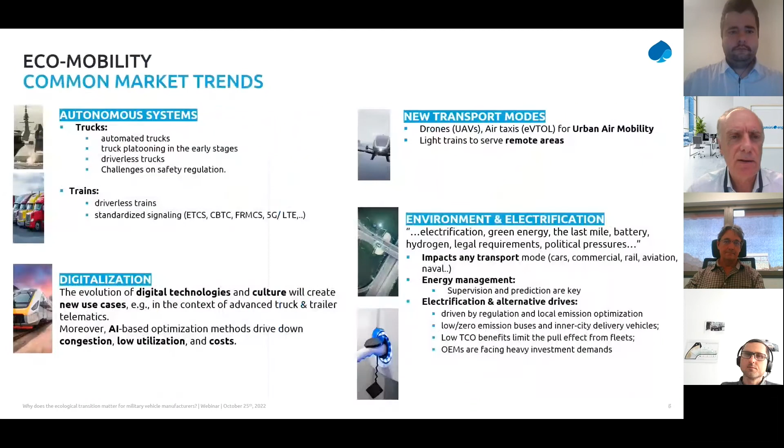So let's go to the challenge quickly. Most of you know the specificities of this tiny molecule, the tiniest of the universe. It has a very good ratio of weight versus energy, but very bad in terms of volume. It leaks very easily, it's very corrosive. And to use green hydrogen, which is the objective, you need a huge amount of electricity, talking about electrolysis production technology.

There are challenges on the whole value chain to produce, distribute, and store hydrogen. We'll discuss a lot about this notion of hub, and market reactions differ depending on the market. In aviation, these are the most fierce challenges to face because of safety and the constraints of volume, which lead to using a liquid form of hydrogen with thermal and cryogenic issues.

So definitely aviation is the most challenging market for hydrogen. Rail, at the opposite, appears to be the most simple, because any diesel train is already electrified, and volume and weight is not as challenging as in aircraft. We have existing and operating solutions on that already.

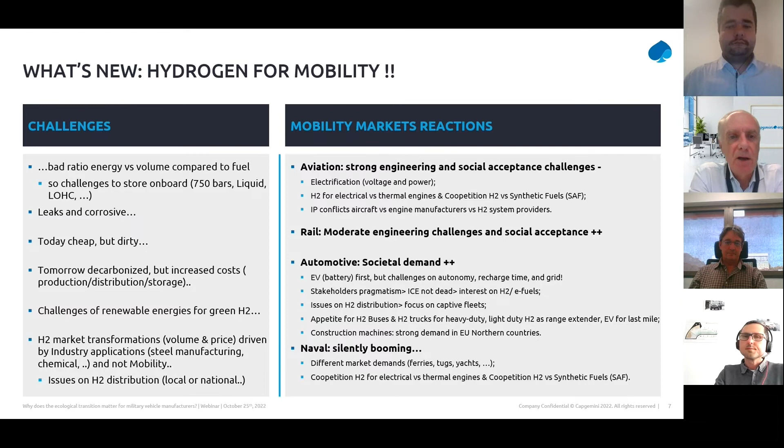Next slide, please. So hydrogen is an old story.

Just a slide to illustrate what's going on at the moment: which countries are producing hydrogen, but which kind of hydrogen are we talking about? We're talking about hydrogen produced thanks to SMR, steam methane reformation, on gas or eventually coal. It works well, the technology is very mature, but it produces a huge amount of CO2. So there's no way to reduce CO2 emissions on usage when you're producing a lot in the hydrogen production.

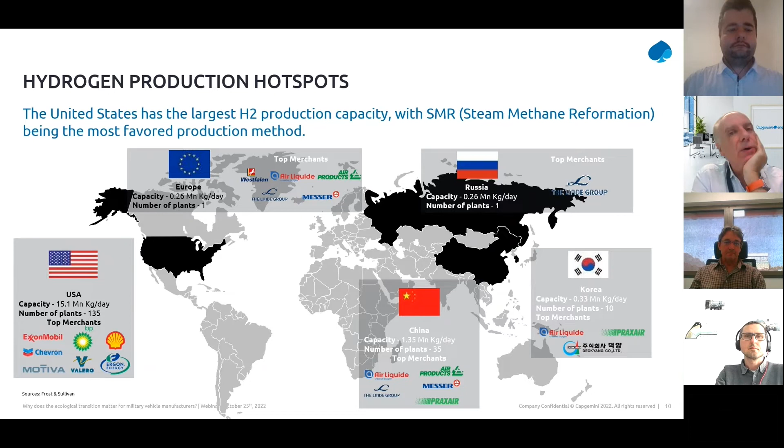Fuel cell: hydrogen is something massively used for decades in heavy industry, same for fuel cells. The first fuel cell was invented in 1839, so nothing new there. The technology and the bricks are already there. So what is the challenge, and what are the opportunities?

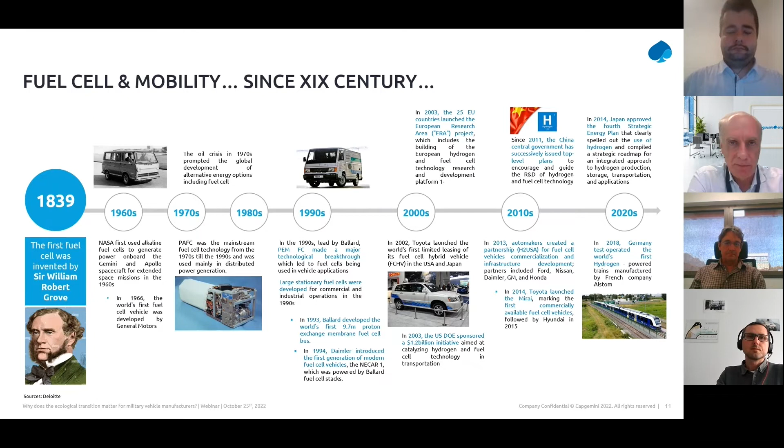What's new is the fact that we are trying to tackle CO2 and global warming, and looking for ways to have mobility that produces much less CO2. So green hydrogen is a solution. Green hydrogen is made from water electrolysis, which requires a huge amount of energy but produces no CO2. So it's very interesting in terms of zero carbon footprint, with very good social acceptance, but the cost is quite expensive at the moment.

Gray hydrogen is absolutely the opposite: it generates a huge amount of carbon, production costs are quite low, and social acceptance isn't that good either. In the middle we have blue hydrogen, which is gray hydrogen produced thanks to SMR, but the CO2 produced is not released—it's captured using CCUS techniques.

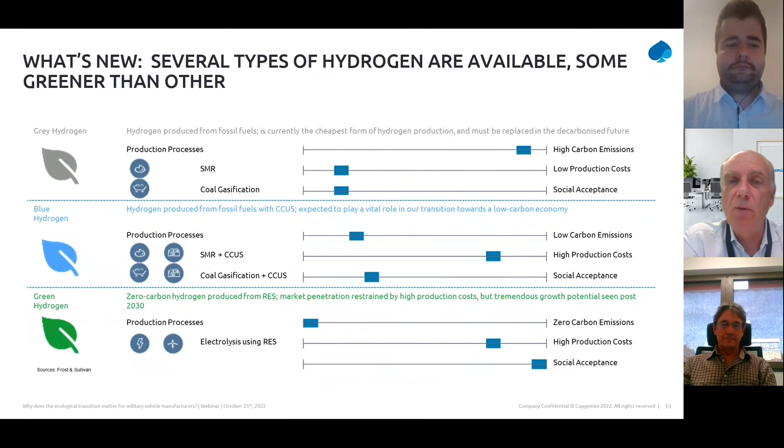So what's new is different ways of producing hydrogen. What's new is the hydrogen value chain. When thinking about usages other than pure heavy industry, we face challenges on distribution, which we'll come back to a lot during this webinar. We can use pipelines, eventually blended with natural gas, or pipelines transporting pure hydrogen, or we can use boats, trains, trucks, and so on.

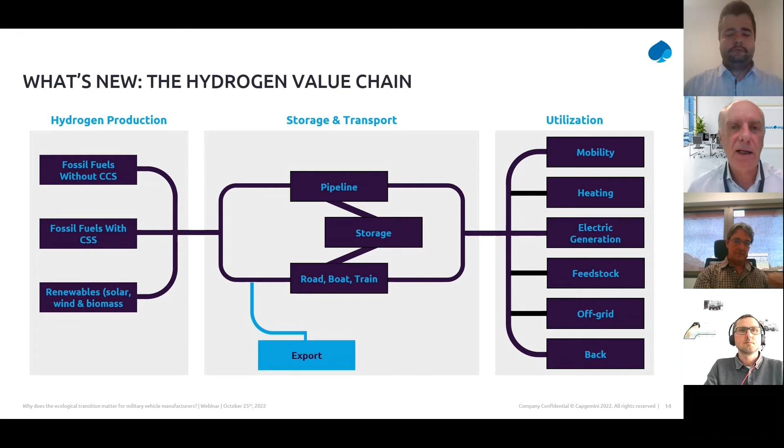We can use gaseous form, liquid form, eventually solid form. This is something different, and the utilization and use cases are much more numerous nowadays than 20 or 30 years before. So what's new is the place of hydrogen inside mobility, and wider than that, lots of different use cases. So we know that transportation emits around 25% of global CO2.

25% is not that big, but it's still a challenge to be tackled, and depending on the market, the CO2 volumes really aren't the same: automotive, aviation, naval, and rail.

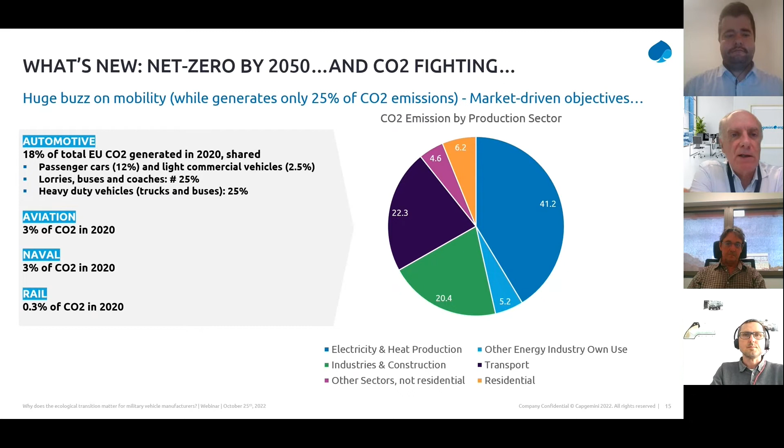The first reaction from a political perspective is that we need to go this way—we need to help the stakeholders, we need to help the industrials face and tackle the challenges. One way to do that is to provide subsidies and money on the table. This is valid for the US, France, Germany, Italy, and Europe. Europe built a very straightforward roadmap and action plan, very prescriptive, with lots of accessible information.

The second reaction is from the market perspective: stakeholders want to collaborate very closely to be more efficient. Effectiveness is the key word on this global hydrogen challenge. So you have lots of collaboration between sometimes competitors, sometimes energy producers, distributors, users, tier ones, OEMs, and so on, trying to go faster and save time and money to achieve the target.

Okay, so quickly, the Capgemini value proposition. Our vision is to help our customers tackle TCO, total cost of ownership, in two directions: pure engineering and economics, taking into account the operations of their system.

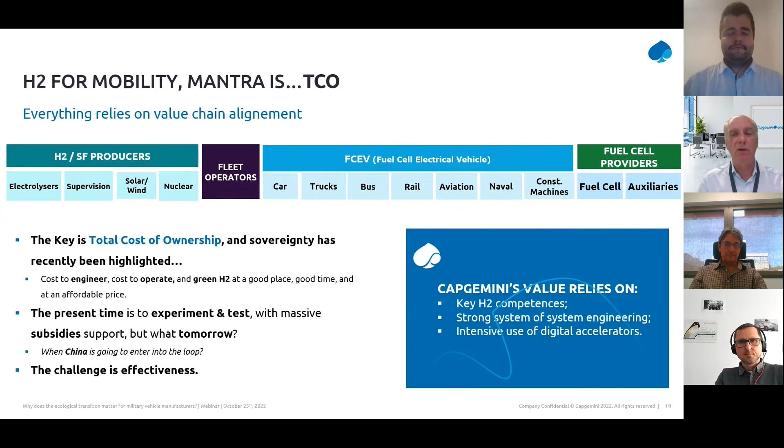First of all, the engineering and system engineering on any part of this value chain. The hydrogen expertise that we have, notably coming from research and innovation, and intensive use of digital accelerators.

So what we're building is engineering across all the key disciplines: thermal, cryogenics, safety, electrification, and so on. We need hydrogen expertise, notably, as I said before, from the R&I dimension.

And some accelerators that could be summarized as simulation plus plus, going up to digital twins sometimes, and AI-based assets that help predict the cost of energy, predict maintenance, and predict different kinds of challenges that can ease and tackle the CO2 and TCO objectives.

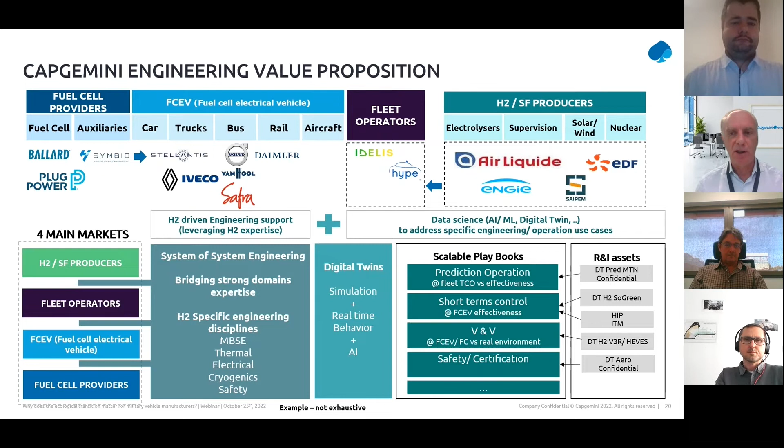Another way to illustrate that: any part of this global value chain is to be simulated. This is the situation today, and again, a huge amount of data to be produced. Sometimes there's some IP conflict, but we are an independent and pertinent company, so this is a very interesting situation for us to help our customer.

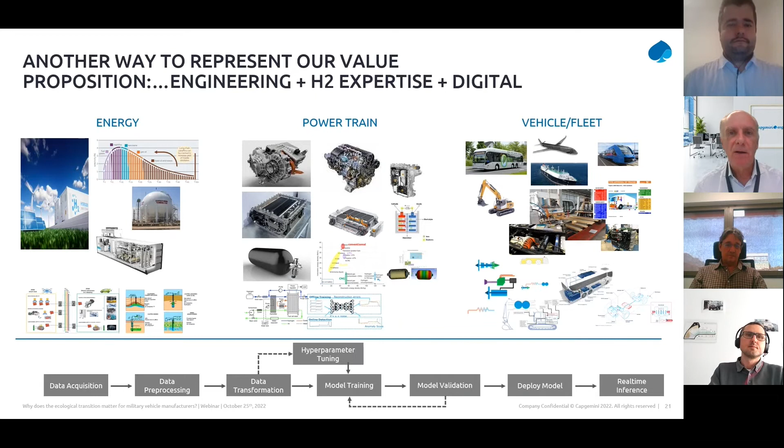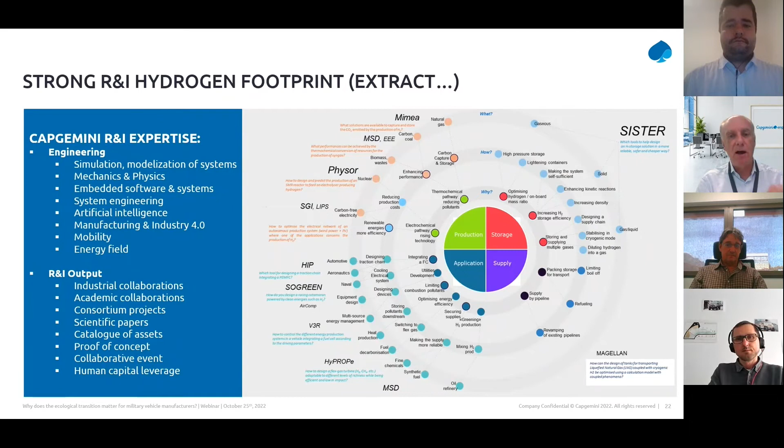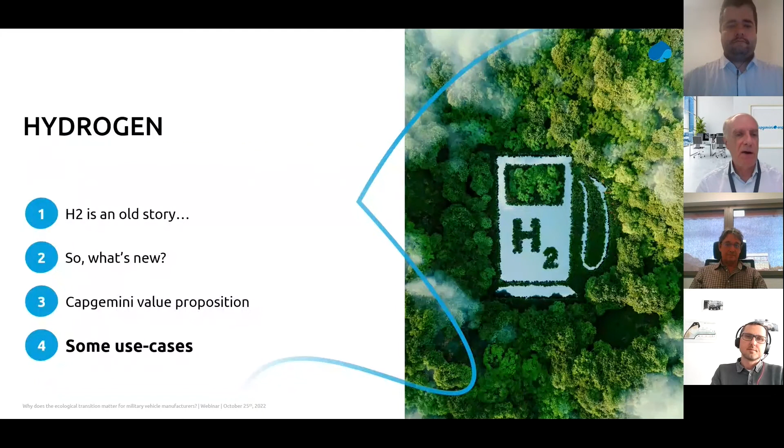I'm going fast because of the time, but all this information will be accessible on the web after the webinar. So, some use cases, quite interesting I think.

We do have the capability, for a long time now, to help customers integrate fuel cells inside different kinds of environments, from telecom stations to a tram, a bus, a train, or a boat. We also have the capability to manufacture and build hydrogen test benches, so we know what the challenges are to integrate fuel cells inside vehicles.

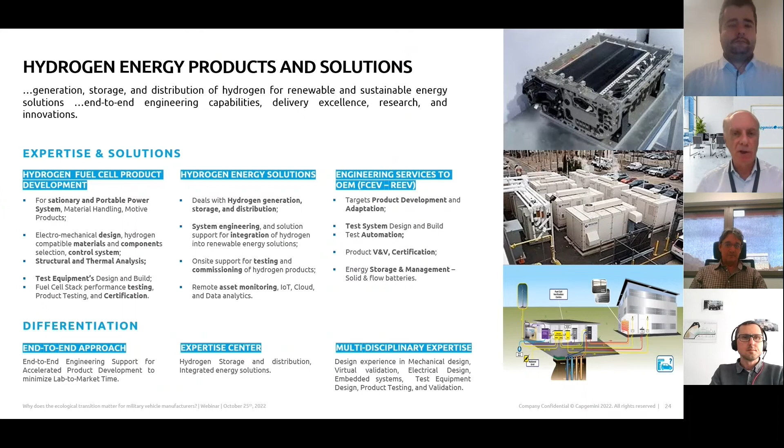This is another very interesting project, quite confidential, so I won't name the clients, but let's say it's a worldwide fuel cell provider that sold its fuel cell to a bus OEM, which sold the bus to a bus operator. And what happened?

Every day at night, the driver coming back to the garage stores data into a black box that goes to a private cloud belonging to our customer. So we have a huge amount of data to play with and to generate some valorization from.

And so we did. We used 2 years of recording for a fleet of 6 buses, and we helped the customer understand what happens in terms of effectiveness, to predict equipment failure. Nowadays, we are going to run this analysis not only in the cloud but very close to the fuel cell—an interesting roadmap and very exciting projects.

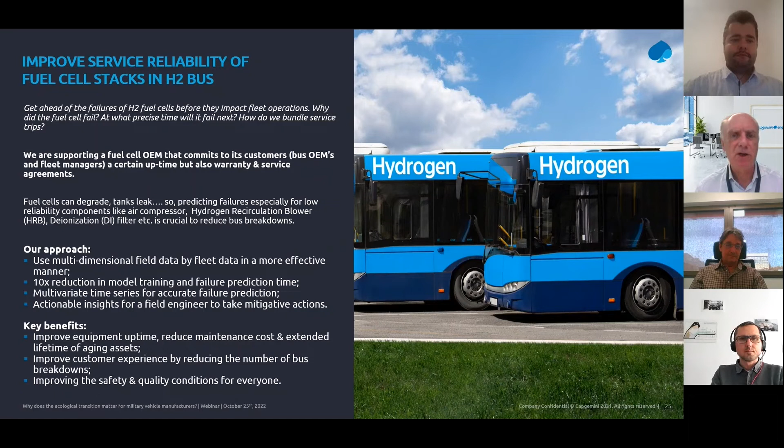We're talking about submarine. What did we do there? We help the customer integrate the whole hydrogen system inside a submarine. The system is composed of reforming methanol to generate hydrogen, to power a fuel cell, to power an electrical engine.

So we face two kinds of challenges. First of all, pure engineering, as I said before: thermal, safety, electrification, and so on. And the safety certification. We help the customer on two dimensions: the pure safety for the prototype to be certified, and from an engineering perspective, to integrate and make the system work inside a very confined environment. This is it for me.

I would be happy to answer any question that will be coming afterwards, after the session, or eventually after the webinar. Thanks a lot.

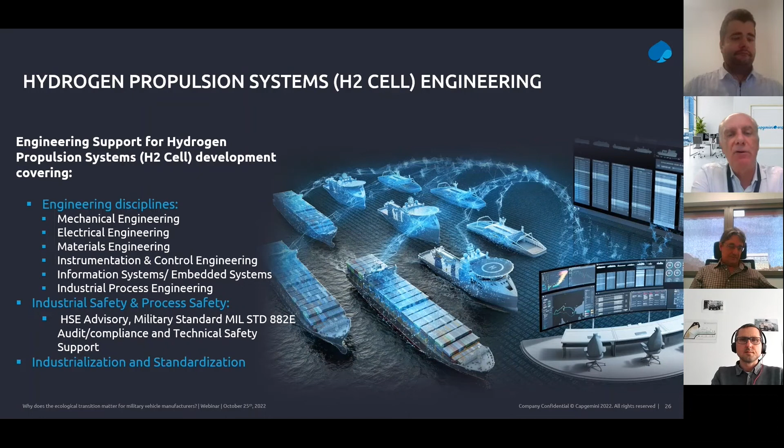Jean-Luc has drawn an overview of the different usages of hydrogen in various applications. Now Etienne will explain on the military side how Arquus intends to answer to this ecological transition. Hello everyone, happy to be here today with great speakers and great audience. I belong to Arquus Defense, French military vehicle manufacturer, and I'm leading the energy subject.

So why does ecological transition matter for military vehicle manufacturers? Jean-Luc gave a first answer. Military vehicle manufacturers should follow the eco-mobility trend because their components highly rely on commercial vehicle components. The second aspect is that military vehicles, when used in training mode, should comply with legal emission rules. And the last concern is fuel logistics, which is critical on the battlefield, and Bernard Tonon will provide data on this topic at the end. So I will now explain how Arquus intends to answer this ecological transition.

Next slide, please. For Arquus, being a business unit of Volvo Group provides a reliable solution to develop its strategy. The Volvo Group is determined to fulfill its commitment to the goal of the Paris Agreement. Volvo set a clear target with an SBTi certified method: in 2040, 100% of products shall be fossil-free, and in 2050, Volvo Group shall be carbon neutral.

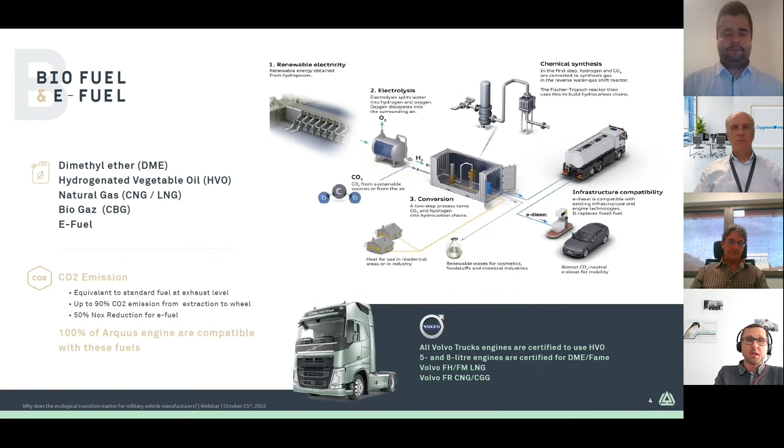Next slide, please. The second step is hybridization. Arquus believes hybrid driveline is the good answer to reduce fuel consumption. First of all, we cannot go to 100% electric vehicles. It is not achievable because even with an optimistic roadmap on battery technology, we would have to replace the 400-liter fuel tank with a battery, where the weight is multiplied by 22 and the volume by 11.

So Arquus already has several experiences with hybrid vehicles. We have the VAB Electer project where we achieved 15% fuel saving. We also have the Scarabée vehicle, seen in the video at the beginning, which is natively equipped with a hybrid driveline. Based on simulation, we think we could achieve, for instance on the Griffon vehicle, 41% fuel saving. Of course, this is because there is a high standstill rate on this vehicle, that's why we can achieve such a figure.

So the next step for us should be to build a demonstrator of a hybrid Griffon with the French Army and confirm this data. Also, we are studying hybridization of a battle tank with the French school Ensta Bretagne, because we think we also have high fuel saving potential on the battle tank.

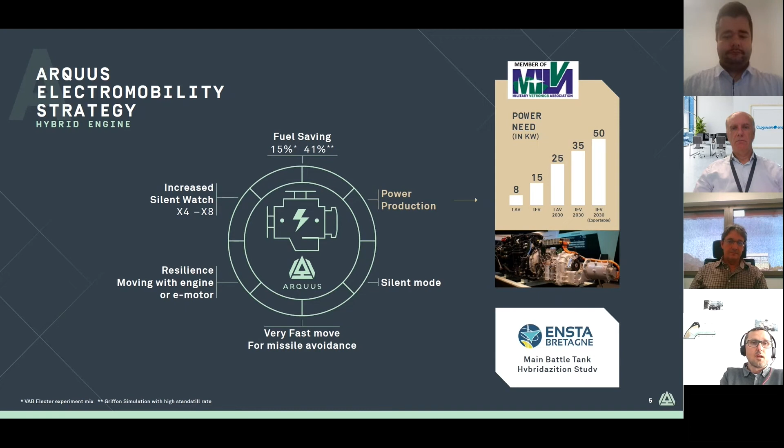At last, Arquus is working with Paris-Saclay University to develop an energy optimization algorithm adapted to military scenarios. Arquus is also a member of the MILVA NATO group to promote high voltage standardization. Next slide, please.

So hydrogen on the battlefield is raising several challenges. Jean-Luc spoke a lot about this, but I would summarize: compact storage, safe storage, air filtering and cooling for the fuel cell is a challenge. Replacing fuel with hydrogen would lead to multiplying by approximately 5 the volume and weight of the current tank.

But of course, for hydrogen, Arquus can rely on Volvo Group technology. We have a hydrogen combustion engine with existing prototype today. And of course, we have also fuel cell developed by a joint venture between Daimler and Volvo.

Also, Arquus believes dual fuel technology could be a solution, because we would be able to rely on fuel on battlefield and hydrogen when vehicle is in training. For storage, Arquus is working with several partners to develop a safe storage approach. And at last, Arquus is preparing calls to build demonstrators applying this technology to make sure hydrogen is a viable solution for military vehicles. So thank you very much for listening to me, and I'll give the floor back.

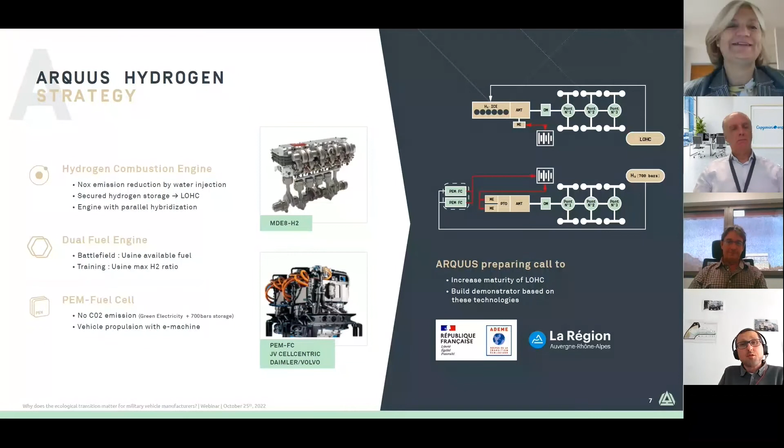Thank you, Etienne. After the military vehicle, our last speaker, Bernard Tenon from CEA, the French government-funded research organization on energy, will present the following topic of new energy technology for military autonomous camps and advanced energy management tools. I let Bernard now speak further on this subject.

Thank you, and hello everyone. Thank you for the presentation. The goal of my talk here is really to try to do the links between the previous presentation and try to do what is going to occur at the camp level. So the objective in the future, we believe that we need to have some evolution of the camp and not to rely only on fossil fuel, which is provided by trucks to the camp, and to find a new way of operating the camps.

Next slide, please. So the first thing that we are going to work to consider forward operating bases, which could be permanent or semi-permanent bases, with some hundreds to some thousands of persons on site, but also some special forces operation bases, which have much shorter time. The present situation for producing the energy at the camp level is relying on diesel genset, and they are using the conventional, unique fuel, which is provided to the camp.

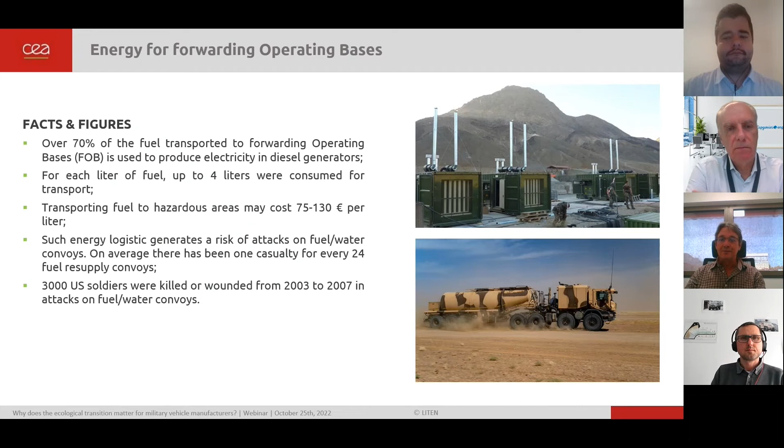Next slide, please. So first at the camp, what we think is that in the future, we need to reduce the energy dependence of the camp from the logistic and try to reduce by, and we assume it is possible to reduce by 30 to 50% the logistic at the camp level. This by two major means. The first one is energy efficiency. So reduce the energy consumption by using more efficient systems, by recovering energy.

I will give you some examples. And the second point, to produce energy locally at the campsite.

So now we have to try to have a global approach of the system, to see from the civil technology what could be used and transported from the civil area to the military area. What type of power sources are available at the camp level? Can we use solar energy? Can we use wind energy? Can we eventually use hydropower, geothermal power? Can we also transfer the waste generated at the camp as energy sources? And what is the energy which could be generated by the heat of these sources?

Then we also have to optimize or maximize all the power conversion systems: heat to power, power to energy, heat to cold. All these conversion systems have to use the most advanced technology in order to reduce energy consumption. As we will rely on renewable sources or sources of energy that fluctuate, and as usage also fluctuates over time, we need storage capacities at the camp level. So we need to be able to store electricity by different means, whatever the solution used. We'll also probably have to store heat or cold in order to avoid peak energy consumption. And we also have to store hydrogen at the camp level.

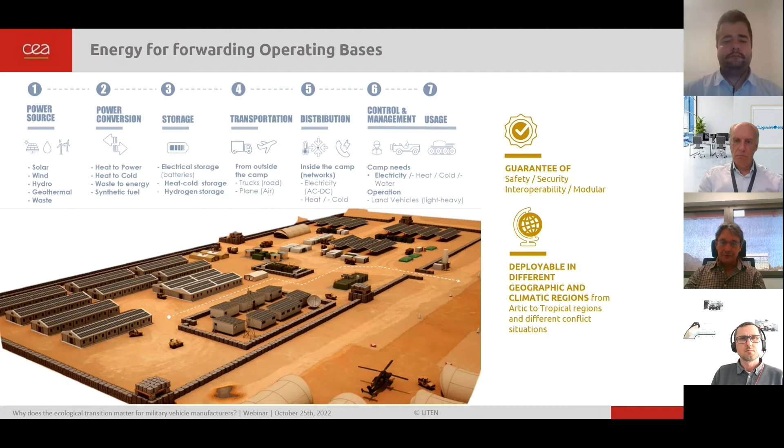Next slide, please. The first thing is we need to change the way we manage energy at the camp level. Today, we only provide electricity using diesel gensets on site, and we need to shift to a more modern way of operating energy at the camp, with local microgrids implemented in different parts of the camp where there is local production and local management of the system. All these microgrids are connected between them and synchronized through a central control system. This way of operating a camp provides higher reliability and higher flexibility at the design level.

This is how we have to design the camp in the future—not a fully centralized system, but something between a centralized system and some autonomous subsystems. Next slide, please.

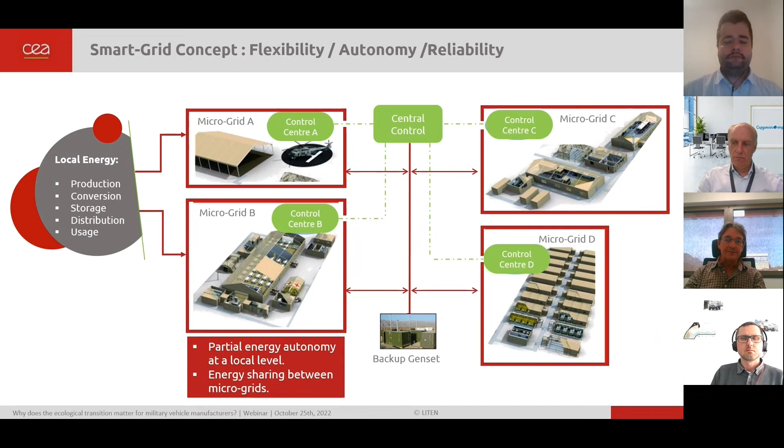In the next slide, I'll try to give you some examples of how we can have energy-efficient systems in order to reduce fuel consumption for the camp's needs. One of the major consumptions at the camp level today is cooling when operating in a hot region, and cooling and heating when operating in a cold region. One of the most important parts of this consumption is air conditioning and refrigeration. Today we use electricity provided by the diesel genset to produce cold, heat, and other usage. As you know, a diesel genset is not a very efficient system—only one third of the fuel energy consumed is converted into electricity. The other two thirds are wasted as heat.

The principle is to try to convert this heat into valuable energy. We can transform heat to cold using absorption technology, generating for instance 50 kilowatts of cold from 100 kilowatts of waste heat, directly substituting this cold for electricity. We can also use this available heat to desalinate water, producing energy directly for water, or we can use the heat directly for sanitary hot water or other heating needs, rather than using electric resistance.

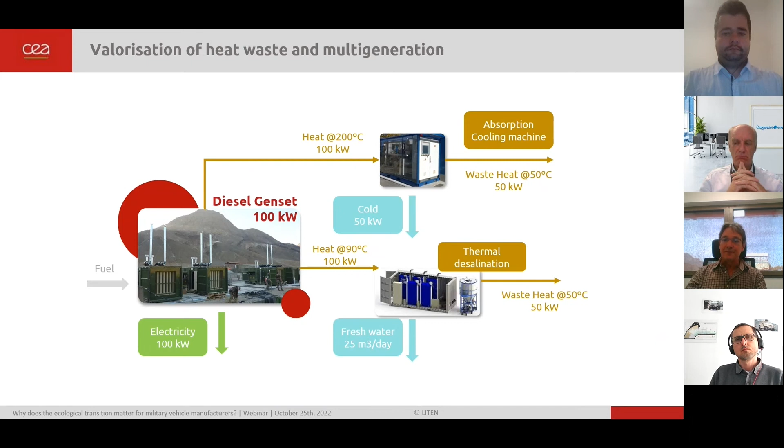Another option is at the camp level. Today at the camp, there is also a relatively large amount of waste generated every day. We estimate that 2 to 4 kilograms of waste are generated per day and per person.

This waste can be solid waste, for instance from bottles and systems at the camp level, but also we have organic waste coming from food. All this food waste can be converted to biomethane, so we have to develop micro-methanization systems, and the solid waste can also be converted to syngas using pyrolysis systems.

What we assume today is that if only 50% of this waste is recovered, we can produce an equivalent amount of liters of fuel, representing about 3 to 5% of the energy consumed at the camp level. 3 or 5% is not huge, but it's not negligible.

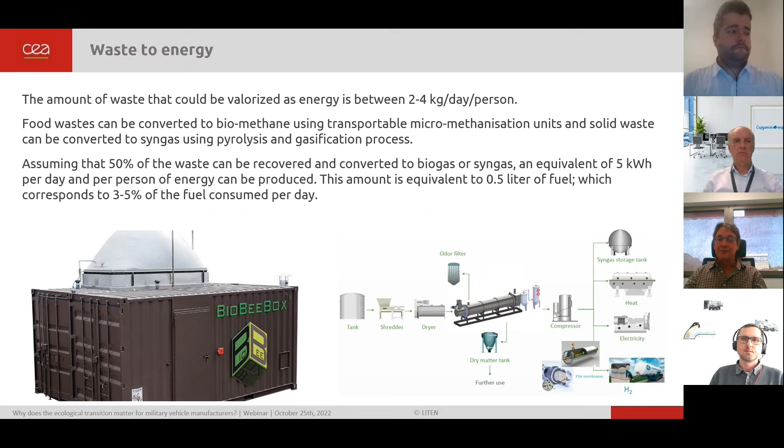We always have to think that 5% of energy reduction is 5% less logistics - that means less convoys which are attacked and more operational efficiency. We always have to think about the impact of energy efficient measures on logistics.

Now coming back to the link with vehicles. As has been mentioned, in the future we'll have hybrid vehicles - vehicles which will rely on hybrid power with electricity or use hydrogen. Concerning electric vehicles...

Today the vehicles have a certain battery capacity, and in order to avoid consuming fossil fuel, it is better to try to recharge the batteries when they are stored in the parking slot during parking of the vehicles, and we try, if possible, to recharge these batteries using renewable energy.

For instance, we can use PV shelters. This is already developed and implemented in civil applications. We know that with advanced energy management systems, we want to charge the vehicles with 80% solar energy.

The second important thing is that as the vehicles will be on site and not always in operation, you can use the batteries of the vehicles - the capacity of the vehicle's generation - to generate electricity for the camp. It can be used as storage capacity at the camp level, and also as a backup system for regenerating electricity in case of losses of capacity.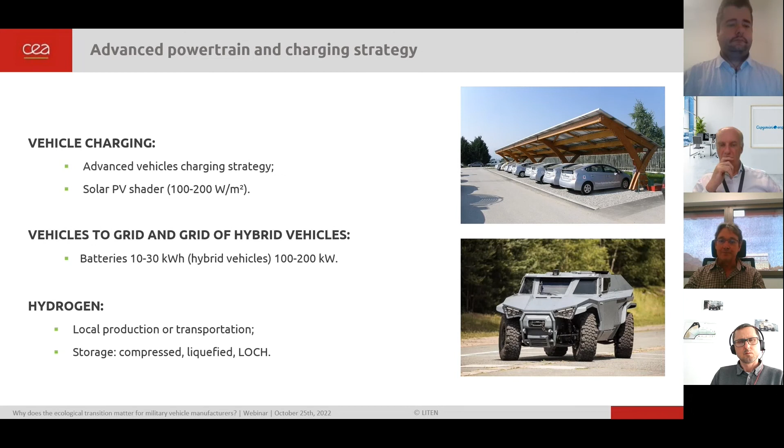Now that we have developed several technologies and options, we need to move to an integrated approach of design and operation. First, we need to really analyze what the future needs will be at the camp level.

So, what will be the needs for electricity, what will be the needs for the camp, the size of the camp, what will be the needs for the vehicles, what type of vehicles we have - heavy vehicles, hybrid vehicles. For this, we're going to define the energy needs for all the different vectors.

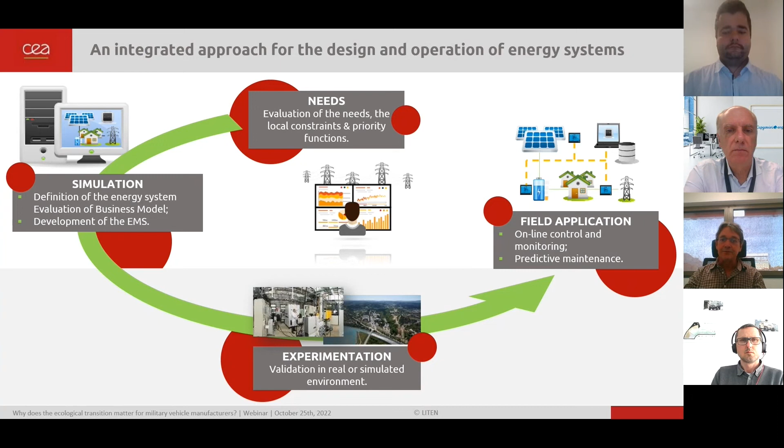Just now, to summarize, as we are a research and technological organization.

We are about 1,000 persons working in different fields of energy technology, and we are here to support companies—technology providers, engineering companies, or end users—in different areas. We are active in renewable energy production, mainly photovoltaics. We're also working on storage and flexible solutions, batteries and hydrogen vectors, where we have specific technology. We are developing batteries, electrolyzers and fuel cells, and also working on system efficiency. Lastly, we work on circular economy, considering how to manufacture the components and the fuels, because part of the system is ensuring security of access to the resources needed to manufacture not only the fuel but also the system used at the camp level.

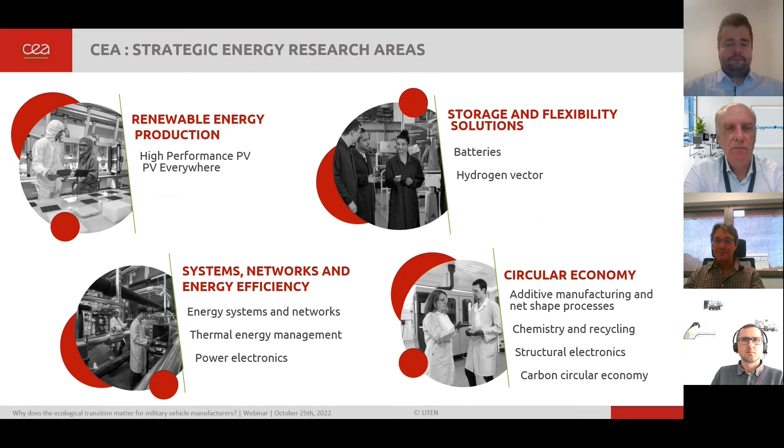Of course, energy is such a big, huge, interesting subject. With Jean-Luc, Etienne, and Bernard, we have done an overview of energy management from three different angles: engineering, industry manufacturing, and French government research, showing the possible evolution of energy management in the field. Thank you for joining us.